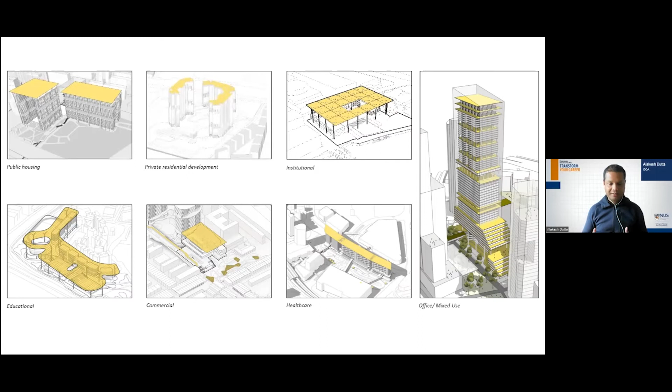So the projects that we undertake in the design studios range from building scale, and in the building scale we also have a diversity of programs that are tackled. So it ranges from housing, both public and private, all the way to institutional projects of various scales and types, educational, commercial, and healthcare projects, and even high-density, high-rise buildings, which are very typical to these Asian cities. So the diversity of scale and programs is essential.

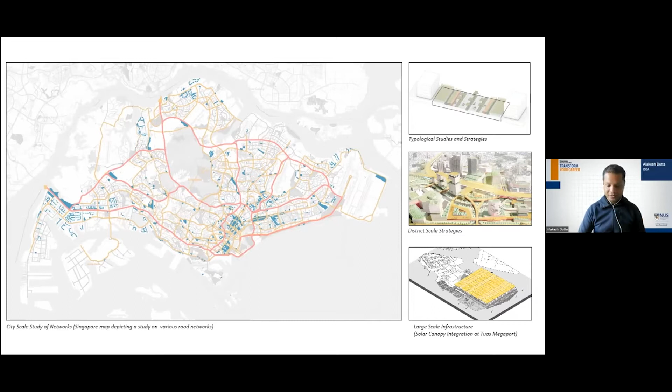And we also take a look at infrastructure projects like megaports and airports, and how the question of sustainability could be implemented, and see the impact of these interventions at the larger scale of the city. The other very important part of this program is a systems thinking approach to the whole curriculum, especially to the projects. Now, why is this important?

First of all, in this ISD program, we look at projects, whether it's a building or an urban district or a city, not in isolation, but as part of a larger whole. In conventional design, designers or engineers tend to look at a building a bit more intrinsically, introvertedly at what's happening in the building.

But it's important to understand that a building or a project is not in isolation, but is part of a larger network, whether it's part of a water and energy grid, or part of a network of green spaces and public spaces. So that's why systems thinking is very important to our discourse: looking at the project, we understand how the project is embedded in the system and how we design so that we have a positive impact on systems.

At the same time, we look at the systems together. For example, if we only look at the water system, yes, we can have an efficiently designed water system, but in doing so, we may not be able to optimize the opportunities in the other systems like energy, green system, public space system, food production system. So the projects that we do are always a way of understanding each system, designing, calculating, maximizing the potential, but at the same time, balancing across the 5 systems.

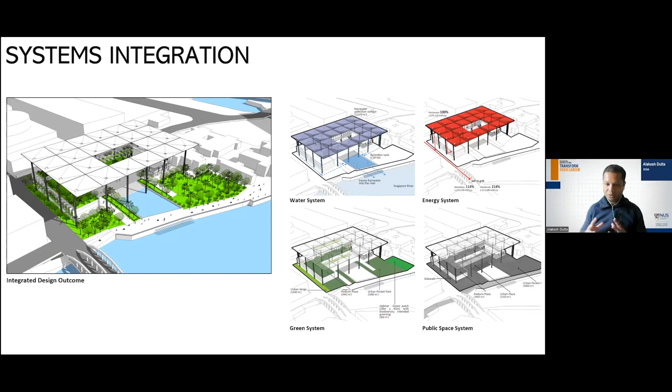So the final project is an integrated whole where it's a functional design, but it's also performing in terms of all the other systems. And this is replicated at the urban scale. So this is a project done in one of the recent studios where we designed one of the districts in Singapore. And on the right hand, you can see that again, all the various layers as different systems are analyzed, they feed into the design, and we understand the calculations and the performances.

And this is important, and why the program is multidisciplinary, because designers, planners, and engineers work in tandem to understand what's the best outcome of a design. So every design decision is not just from a designer's point of view, but it's also informed by the engineers who are working together to create a synergy, much like how it happens in the industry, where real projects are done within an ecosystem of several disciplines.

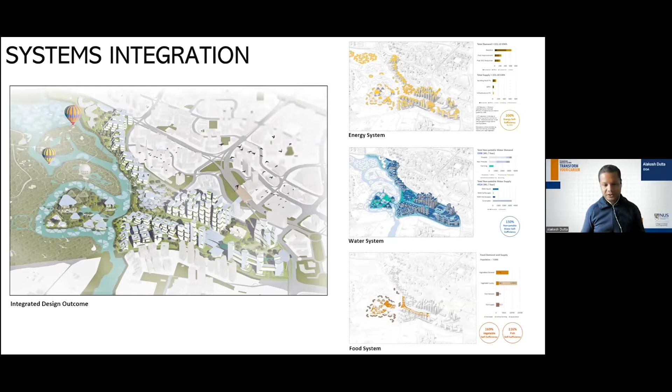And a successful project is one which is able to marry all these disciplines together. So that brings us to the projects. The projects are at the heart of the ISD program, and it happens in studios where there are constant discussions, both with the members of the faculty, with industry experts who frequently come to the studio, as well as amongst the students themselves, because everyone comes from a diverse background, from a diverse academic knowledge with professional experience many times, and hence they're able to share and inform the design to work as groups, which results in a unified whole.

The studios are also supported by several site visits. So we do go and visit, and we take the advantage of being located in Singapore to go and visit some of the landmark projects which have been able to drive the agenda of sustainability to a larger extent compared to conventional buildings. So the studio and the projects are an integral part of the program.

And like I said before, the program is multidisciplinary, and we ensure that people coming from various disciplines are able to find their comfort and able to find the niche through the projects that are done. So for one project, there could be different streams or different parallel ways of approaching a project, and we do this based on the discipline of the students that are coming in. So while architects will look at the building and urban design scale of the project, planners and landscape planners are looking at the larger scale of the urban district, neighborhood, and the city scale.

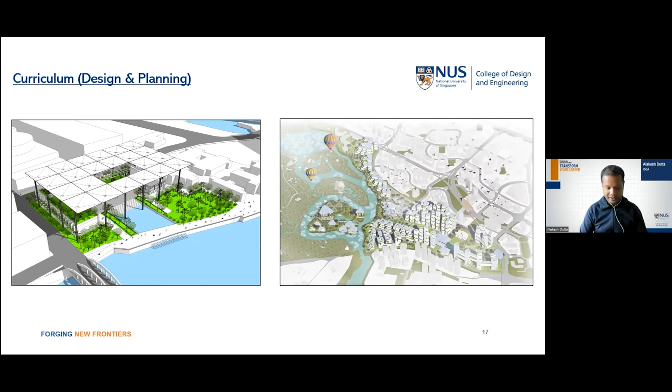So in doing so, we are able to nurture the skill set of the students. We offer a cross-disciplinary approach, and the most important thing is we are trying to develop a critical thinking and analytical temperament in the students through these projects. Now, I'll just give snippets of examples of the works done by different students from different backgrounds. So I've already shared with you these two visuals, which largely depict the outcomes of the work done by architects or planners, but supported by the people with the engineering background. But the engineers themselves have to also work on the performance metrics.

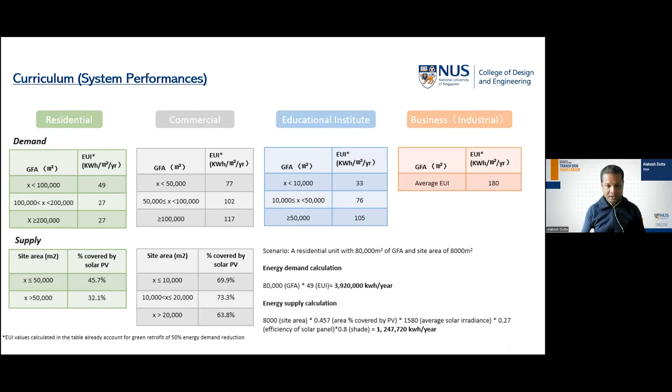And here is an example of a study we did, where we are trying to analyze what is the optimum area within a site that the development needs to dedicate, whether it's on the site or on the top of a building or on various surfaces of the building, to achieve enough production of renewable energy that it becomes a net positive or at least a net zero building. So our students were able to come up with certain rules, and we have tested the rules, and we do it for different typologies of buildings.

So again, jumping the scale from the building, we try to take these rules and apply them to the larger scale. And we see here that the red line depicts the energy demand for Singapore. And the green line depicts how, if these rules are applied at various scales to the buildings, we can close the gap between energy demand and renewable energy production. And we apply it to the Singapore scale, as you see on the map on the right-hand side, and test at what point and through what design interventions this gap can be closed. So calculations are an important part of this curriculum.

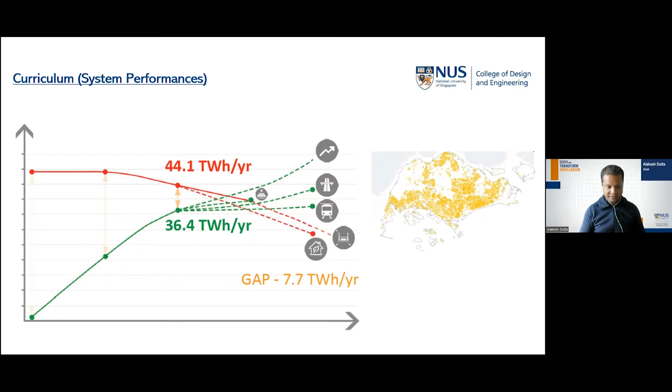We are cognizant of the fact that design alone is not enough. We need policies, but we also need economics. Because in a real world, every project decision will be driven by capital investment, the cost.

And that's why we have been liaising with the NUS School of Business, where the work done by the students in the ISD program is worked upon jointly with the students of the School of Business, and they are able to analyze it from an economic point of view to see the investment required to achieve the design propositions that we are proposing to improve sustainability. So what's the cost of that, and what's the impact?

Is it beneficial to the individual stakeholders? Is it beneficial economically to the government? So that's what we have been doing, and this is something that we want to take even further in collaboration with the NUS School of Business.

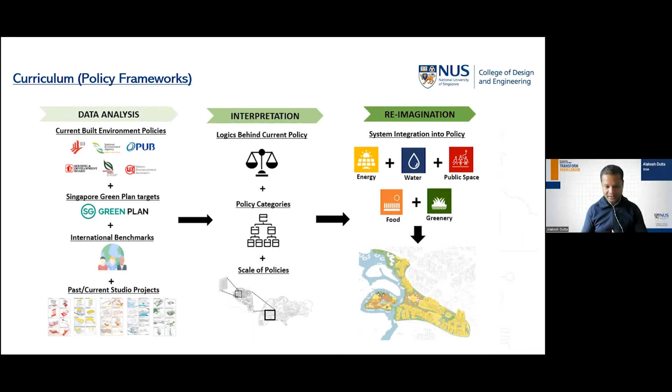And then finally, they are able to propose what changes can happen to the existing policies or what new policies need to be brought in that will help to make these kinds of design decisions into reality. And then these are proposed against current policies versus the new policies that the students have proposed.

And they share this at the final presentations, and we now usually have people from different backgrounds coming to these final presentations, including people from the government sector who are able to appreciate the work done by the students and give their feedback, and so there is a constant dialogue between the work done by the studio and the actual government agencies who are implementing these policies on the ground. So that constant dialogue is established and sustained.

And finally, the work that we are doing in the studio is important and essential to the global context. We all know climate change is important, and various institutions are coming up with policies that need to be implemented to really effect actual change for us to mitigate the impact of climate change. So the United Nations Sustainable Development Goals are an important part of it. And the work done in the ISD studio is aligned to 11 of the 17 SDG goals that the United Nations has put forth.

Even at the local scale, many of the policies that the government is looking at, the Singapore Green Plan, the SG 30 by 30, which is targeted to improve the food sufficiency of food production in Singapore, all the way to policies like City in Nature, which is targeting to improve the provision of natural and green infrastructure in Singapore. So the work done in the studio is really aligned to these national and international policies and goals. And that's why the modules that are taught in the studio are crafted in a way that all the various aspects are covered.

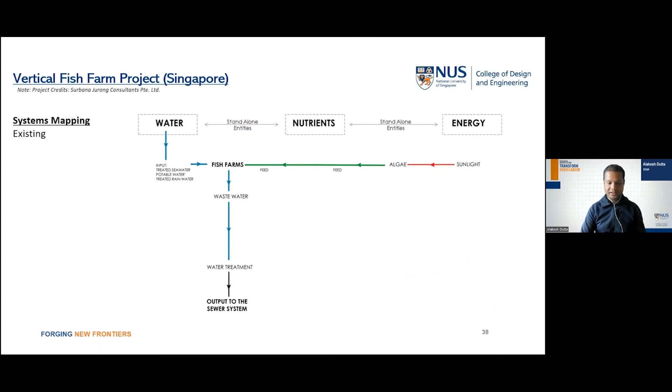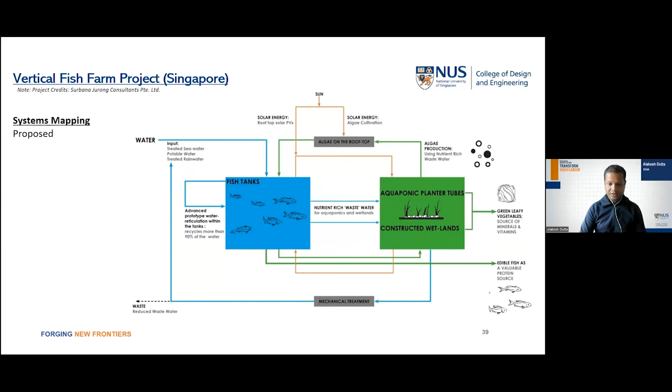I'll just give a brief about the works that I did after graduating from the ISD program, and how the teaching of ISD enabled me in my work in the industry. So one of the projects we did was a vertical fish farm, a very unique project. And I was able to bring in the systems approach to a very conventional way of designing fish farms, which are very resource intensive. So the systems thinking enabled us to create unique ecosystems, which is based on a circular economy, and it helped us increase production, become resource efficient, and create a project which has again won several international accolades.

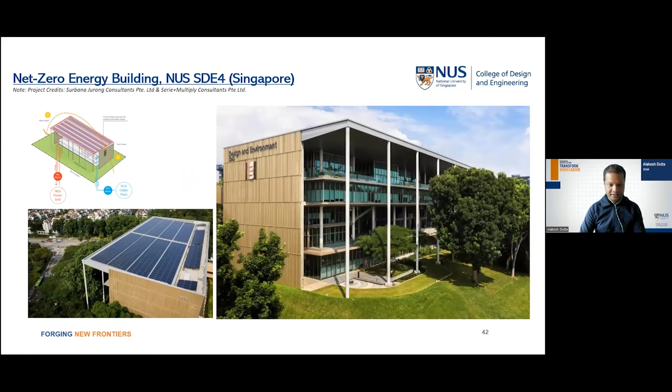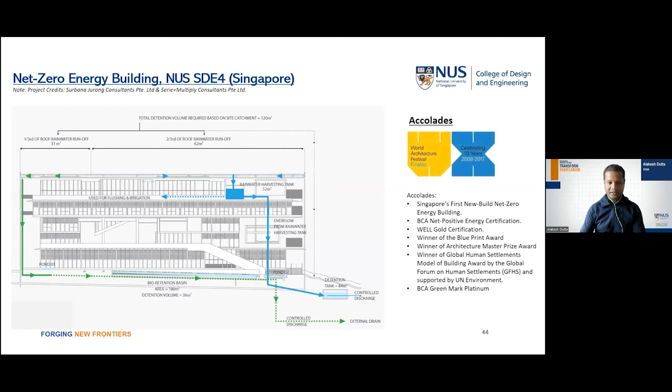I was also involved in a project which belongs to the NUS School of Design and Environment itself. It's the first new build net zero energy building in Singapore. And again, what we learned in the school through a cross-disciplinary approach, working with engineers, allowed me to work efficiently on this project. And this too has won several accolades across the world. I'll invite Celine, who is another graduate from the ISD program, to share a bit more.

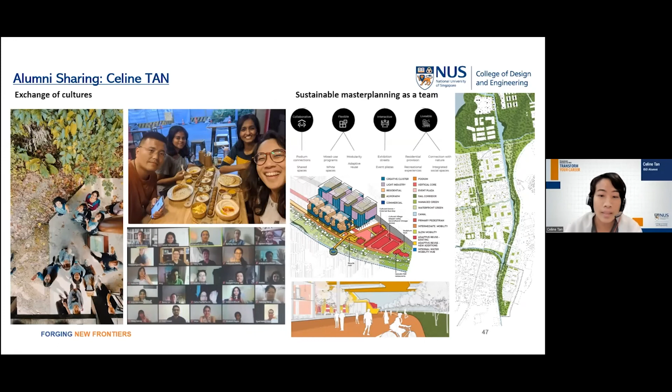So when I started my course in 2020 amidst the COVID pandemic, it gave me a really good perspective to study sustainable master planning along with other batchmates from different cultures who had the same motivation as me towards sustainability. And going into detail, I felt that the best takeaway from the course was being trained to use systems thinking, which Alakesh had already mentioned before.

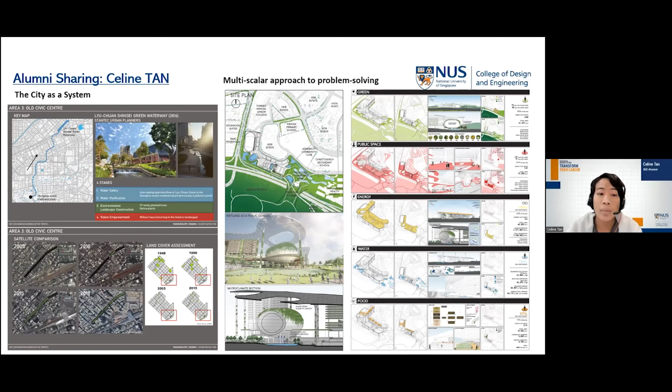So I will not drag on too long about it, but I find that even working in practice right now, it's a very powerful approach to understanding the pain points in a city and how to remedy it through multiscalar design solutions.

And then bringing it forward to after graduating, where I first worked for one of the ISD professors that Alakesh also mentioned before, Dr. Anuj Jain, who is a director of an ecological design consultancy called bioSEA. There, I built my foundation using the science of ecology and combining it with systems thinking to advise on design decisions made in building projects.

So you can see here, this is the approach that we take based on evidence that we collect on site, and then trying to understand how we can knit and weave better into the blue and green systems to conserve certain ecosystems and to boost biodiversity as an outcome of the build project.

And so armed with this scientific foundation, I then carried on to further detail it out as a landscape designer in Ramboll Studio Dreiseitl, which is a landscape architecture firm that champions sustainability through decarbonization, resource circularity, biodiversity, and inclusion, which I feel is very much bolstered by my previous experience in ISD. And coming into this firm, I already have the confidence and the knowledge to implement all these things in my real and built projects.

So here, I'm encouraged by my senior colleagues also to utilize systems thinking and science-based approaches to sustainable design. For example, creating wildlife habitats for fauna, not only to survive, but also to thrive as well. So that will mean not just providing the right amount of shelter or food, but also placing it in a way that is in good relation to the overall context of the site.

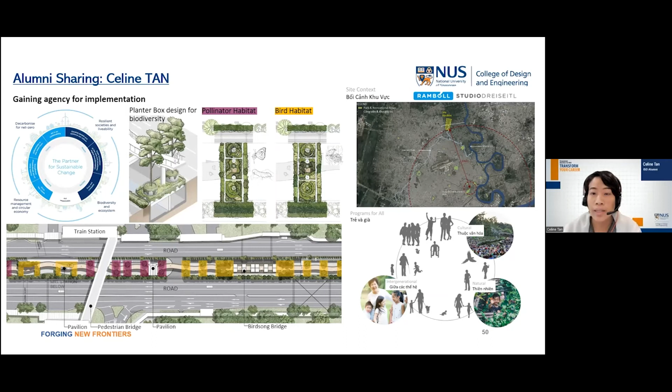So to recap, after my architecture bachelor's, I was left at a crossroads, wondering how I could achieve my best intentions through my career. Without a master's in architecture, would that stop me? Yeah, and I think that boils down to my own perspective on what I have found valuable in the ISD program. And even with another pathway, I think I still can achieve the same outcome and even open up more possibilities and opportunities for myself. And I hope that should you choose to pursue the ISD program, it will be the same for you too.

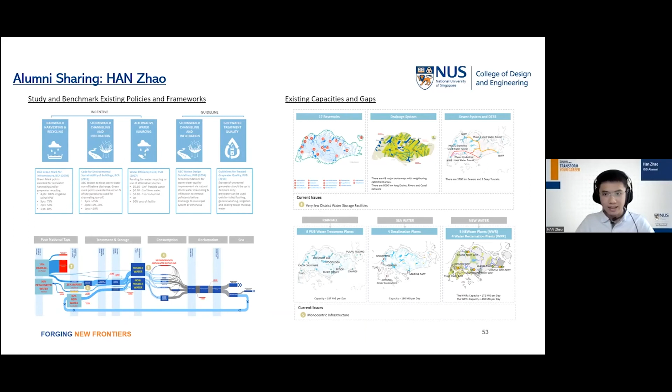We also analyzed Singapore's existing policies and existing design guidelines of these 3 systems. So this process allows me to understand the current capacity and the gaps of this country, so that I could identify the potential where our design and planning can take part in and solve problems. In fact, I have to say this process is really fascinating.

Imagine that you are studying in a totally new city, which is known as the classic case of urban planning. So what would be the most important thing you would want to get out of it? My answer is the insight and the reflection. The insight is about how this city becomes so excellent, while the reflection is about what else is lacking in it. So in the past 1 year, I have not only learned about what makes Singapore great, but also considered the struggles of today. More importantly, I also got a chance to face and solve them.

So for our 3 target systems, our solution idea is to make every building a producer and make every district self-sufficient through an integrated method, but how to make it? So fortunately, over the past 10 years, the works of our ISD studio are a continuum where the past projects are collected into a dataset. So this dataset provides insight into how different designers approach the same problem.

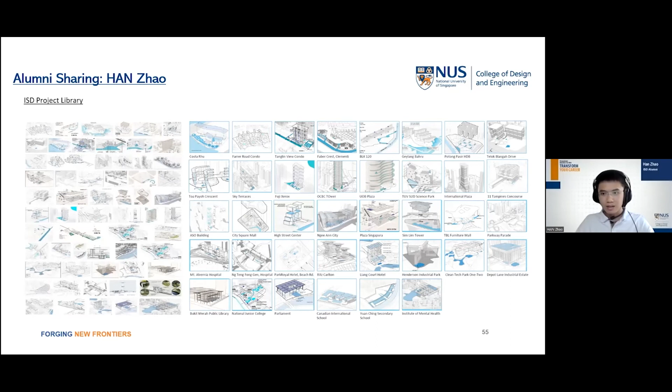So last year, my classmates and I were so lucky to be allowed to review and analyze this dataset in order to extract the rules on design and production, as well as the design guidelines based on these rules. So standing on the shoulders of these projects, we managed to build a quantitative relationship between building production and the construction index, such as the land use, the plot ratio, or the site area. That is to say, if we have a clear idea of the land use, the plot ratio, and site area of one building, we could be able to estimate the food and energy production of this building.

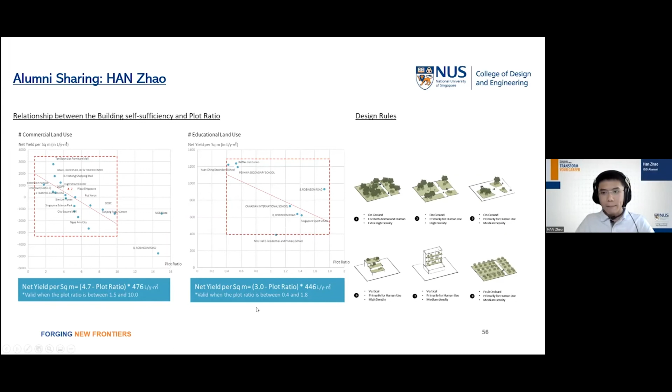In addition, we also developed design guidelines for each system to guide the buildings to maximize their production when they are designed. We have also taken Jurong Lake District in Singapore as a test bed to check our rules and guidelines. Personally, I benefited a lot from this working way, from guessing to verification to summarizing and to application. Currently, I am continuing to work on this project as a student researcher, even though I have graduated. We are working towards creating rules which could be fit into a GIS model.

With these models, we are able to predict that if all buildings were designed to be generous, to be regenerative, what the productivity capacity of buildings, districts, and the whole city would be. At the same time, we are still trying to further refine the rules with the qualitative method, taking many realistic limitations and features into account.

We are also working with Singapore Urban Redevelopment Authority with the target of extending our rules to the whole of Singapore. We plan to join our GIS model into the Singapore master plan. In this way, we hope to see Singapore's potential productivity and evaluate the cost at master plan level. So I will soon return to my previous institute and continue my work.

I have to say, this year at NUS in the ISD program has been the most rewarding period of my life. I will take what I have learned back to Chengdu and continue building it. I am sure it would be very constructive. Finally, welcome to ISD. Welcome to Chengdu.